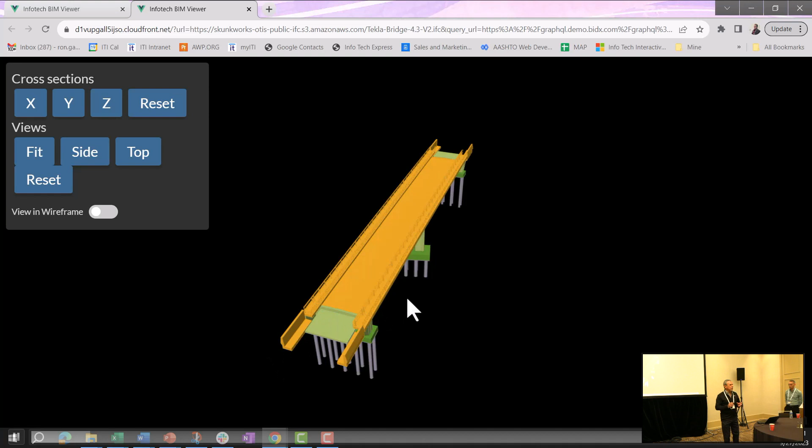I want to be able to bring any model published to IFC and be able to view it in the bidding environment and be able to use that model to do my bids. And so we developed a viewer, IFC viewer, okay?

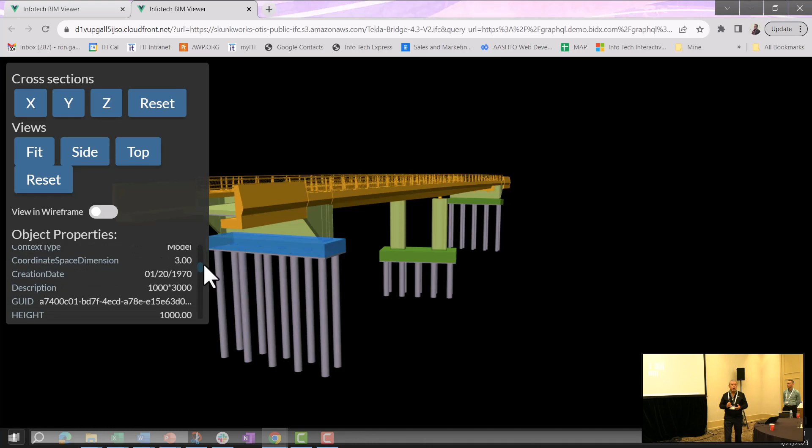And we've got models from Trimble Tekla that we use as examples in this. I've got all the models going to come up here in a second in a little video that we use to review. I've got some HNTB providing some Bentley models as well. And I forget who I got the Autodesk models from. You remember we got those from Bentley? We've got some Civil 3D models as well.

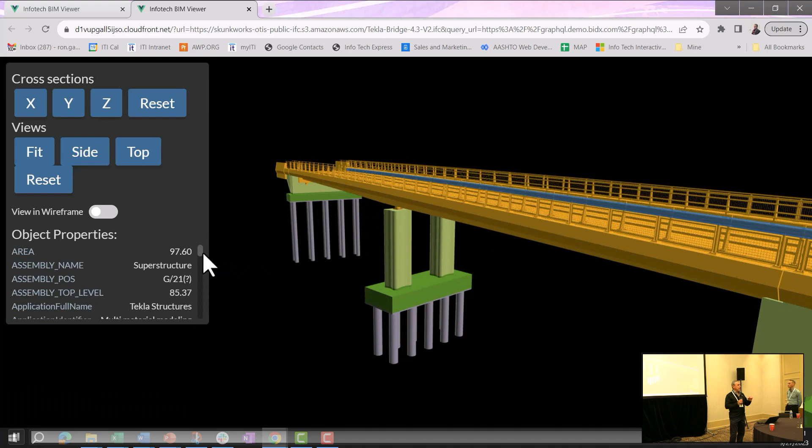But if you put the information in your IFC, we can query that model and find that information in the IFC model and provide it to you in a simple web-based viewer to be able to potentially use this in the bidding environment. So that, and the long-term goal is to give you the query and measure, the takeoff type tools that you need in a viewing environment.

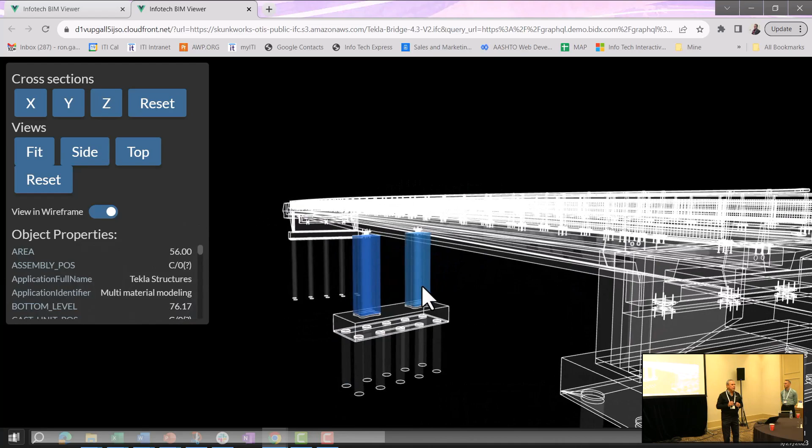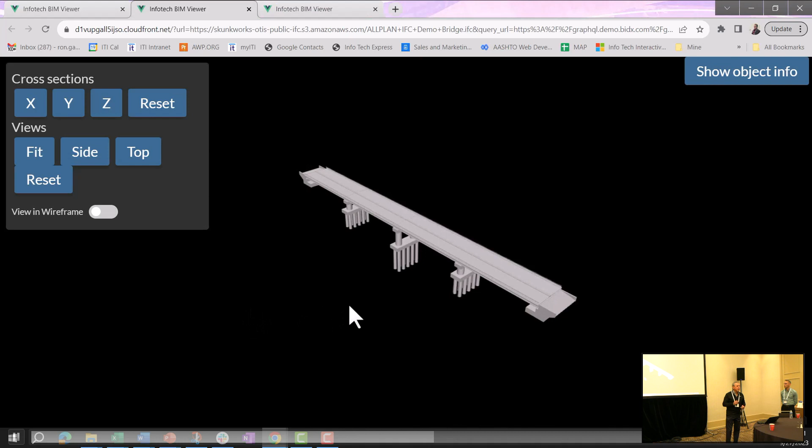And so the idea is here to give everybody a browser that you can come in and query this. And we show this to Trimble and all like that, and we think this is a way in the bidding world what we need to do. And Trimble's got some other tools that they do as well.

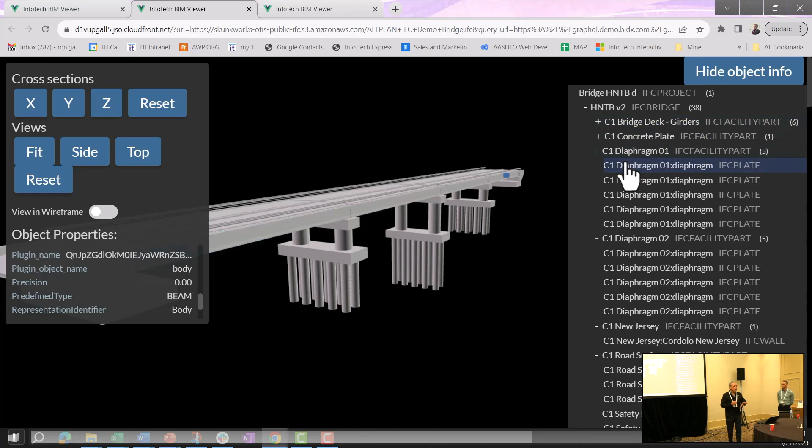And the great thing about working with people, we do compete with Trimble in a couple of places. But we identify those areas that we compete, and we do this with all the people we partner with. We identify those areas that we compete in, and we tiptoe around one another and play amongst them. But we're all professionals, so there's no reason why we can't get together.

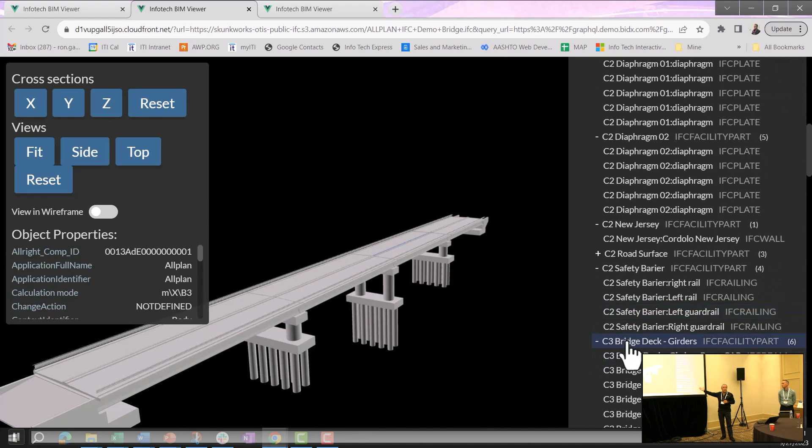But you see in this, if you come in and actually see all the IFC attribution. Now, let's be honest, this is only as good as you make the model that you export from your design. So you got to export a good, solid model for this to be useful. But it also shows you all the attribution that the CAD model is put within that as well. So this is kind of just a little prototype that we're working on.

And as part of look at that future, that vision of what we're trying to build toward, Adrian's going to share some of that with you as well.

And a key part of that vision being able to do that, is one of the things that I hear a lot is that AASHTOWare is a closed environment. AASHTOWare is not a closed environment. There are APIs available in AASHTOWare. It does run in a relational database, and you as a DOT own that data.

So there are ways, we prefer that you come through AASHTO, through us, to be able to make those connections into the model, but we can connect, and I'm doing a presentation with MnDOT tomorrow afternoon at 4 o'clock, shows you things that we're working on Connect, some tools together. We're doing some things in both the Bentley and Autodesk states to connect AASHTOWare with your design tools to be able to do the full connectivity and the full digital workflow that you need to be doing within this.

So I'm going to shut up and turn it over to the smart guy and say something a lot more useful than what I have to say. But Adrian, the floor is yours.

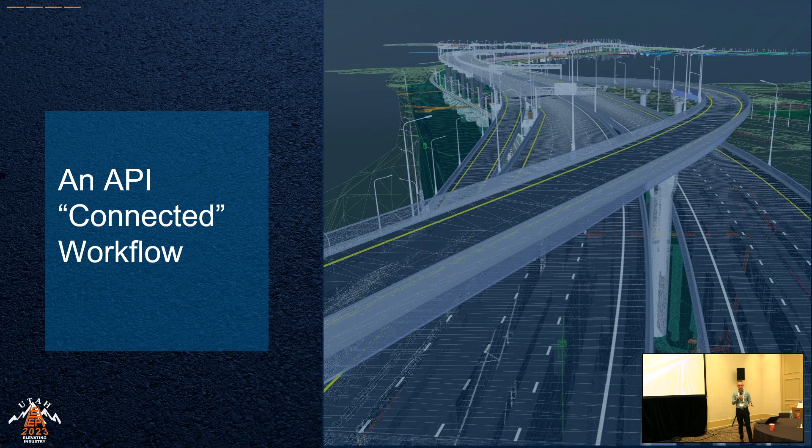Ron already mentioned some of the APIs, so that's really a core component here. Having access to that data and being able to use the best solution or other applications for what you're needing is really the key aspect of using APIs. So we can have that data there, we need to be able to access it, but you obviously want to be able to use it in your native program.

We at Trimble call our APIs connectors. Everyone else has a different name for those, but they're fundamentally the same thing. It's a bidirectional link between an open database, or an object-oriented database, and the native software, which enables you to design whatever you need in your design package, push it into the database, and then have it pushed out to the field and consumed by the machines actually constructing the project.

And then of course the nice added benefit is that data set then becomes the digital as-built. So the nice thing about those connectors being bidirectional is, of course, we can push any of those design changes back to the original designs if we need to.

Important point to note: if we're dealing with a model as a legal document, what we're dealing with is a design that doesn't change. But then of course we have additions to that design, so you can always refer back to it. That's really the nice part about having all that information accessible within a database.

One of the other key aspects of those APIs is that we're able to better understand the data at its core. So one of the things we're able to do here is, whilst this just looks like a spreadsheet, take the CAD standards for a state and apply that into what we call conversion rules. This is where we're looking at the data within the DGN libraries, or the feature definitions, and associating those within objects, or as objects within the database. That's a really big difference from just using a standard workflow.

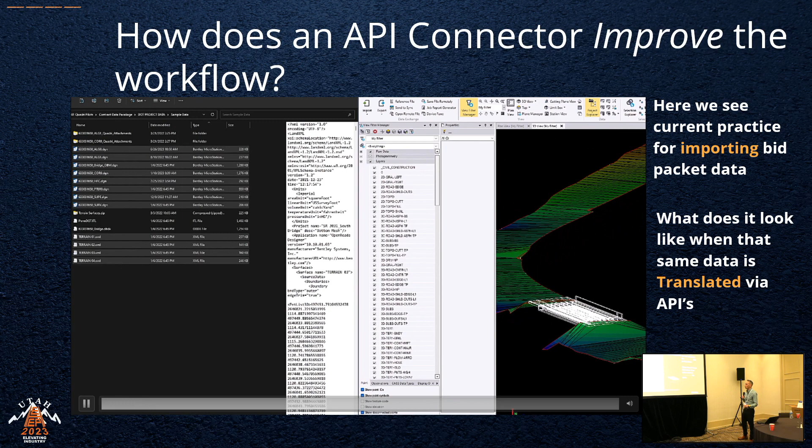So the benefit of these APIs is we're able to improve that. Now on the left-hand side, we're looking at that full same design data, which was able to use those templatized conversion rules, or APIs, to read that data in all of the objects, all of the solids and structures.

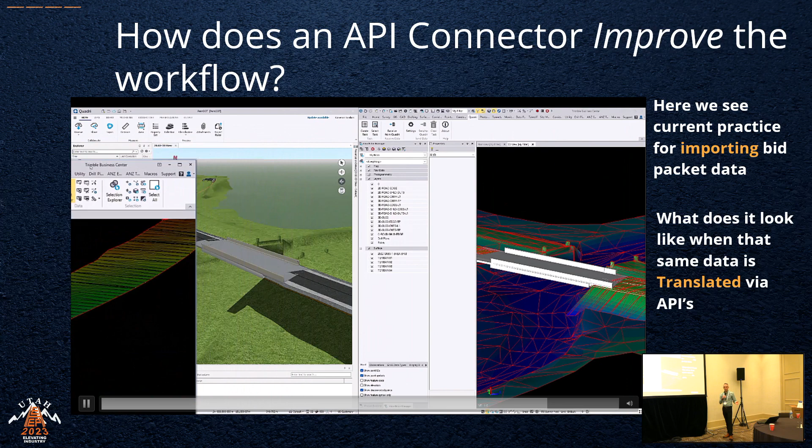And now on the right-hand side, we're looking at it from a contractor standpoint. As you can see, that data set is significantly different to what we were just looking at. It's far richer—we've got solid objects, we've got attribution, and that's what feeds into the process to go into the actual field solution side of things. So this is where we're improving the workflow, and this is how, by having a digital model as part of the process, we're able to get better data to the field, better data to the contractor, which is a win-win for everyone.

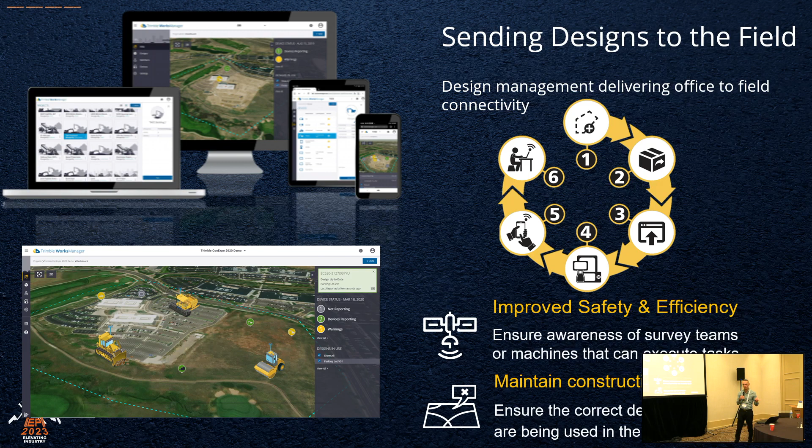So why do we want to have connected? We're showing taking the data from the design phase, but now we want to actually connect it to the field, and there's huge benefits associated with that. We can take those designs and ensure the machines constructing the project are using the latest designs, but it's also enabling us to be more accommodating of different changes. If we find a design exception or an issue with construction, we can go back to the office, update that design, send it remotely out to the machines, minimize downtime, and improve safety. In the past, that design change would have had to be loaded onto a USB stick, driven out to the site, plugged into the machine, uploaded—not even sure if it's the latest design. That's the benefit of office-to-field connectivity, and that's really what these solutions are able to do.

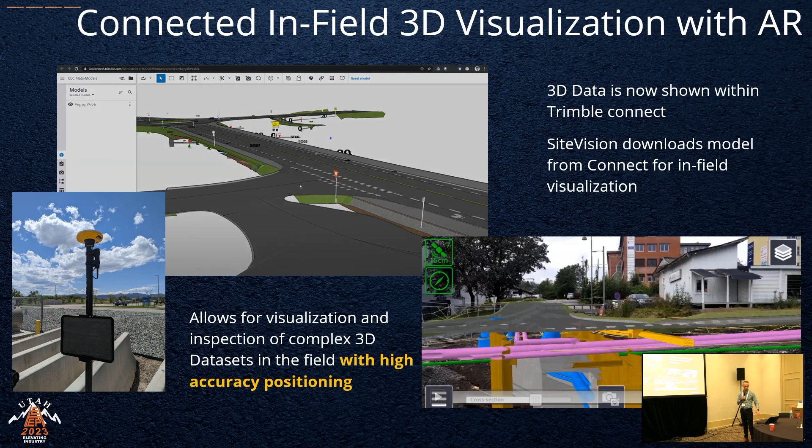The other core component is being able to visualize that same data in the field. So we can have our high-accuracy positioning solutions visualizing the exact same data from the same object database we were just viewing. Not only are we carrying all of those attributes across, but here we're viewing that data in the field. This is the same data the machines are actually using to construct the project. There's attribution on these, and we're able to visualize them with, in this case, an augmented reality viewer called SiteVision. The benefit is you can consider it a model or a viewer into the data stored within the database, which is what's actually being pushed out to the field.

From a contractor standpoint, and this is something we really like to focus on with Trimble—we've had contractors using digital models for decades. They've been recreating their own designs because historically they haven't got the right data in the first place, or more importantly, they just haven't trusted the data. That's the key benefit, I think, and this is resonating everywhere. I've been attending these IHEEP conferences for many years, and it's been great to see the transition of understanding what the contractor is going to be using. They're the ones where the boots hit the ground, actually taking that design and constructing it, and if we can improve it for them, it's a benefit to the owner as well—to the DOTs. It improves the whole process, and that's really where we're applying the BIM process.

So here they're actually taking those same designs. This is what they're seeing on their mobile solutions, what the machines are actually using to construct the project, and then being able to use that as part of the validation as well.

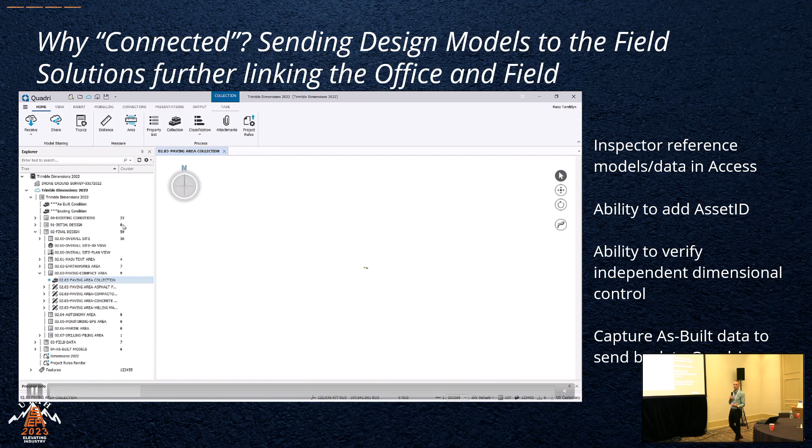So what we can also do is streamline the models for the field solutions. One of the benefits of the object-based workflow is when we read that data using those APIs, everything gets associated with an object, with an attribute, with geometry. The key benefit is you can then query that data. Instead of having to look at a certain file, unsure if you've got half your objects in one file and half in another, here we're able to look at each individual component. That's very helpful to the contractor as well, because they're able to segment that—they may want to estimate on the base of a retaining wall, for instance, because that's what they're being paid to calculate.

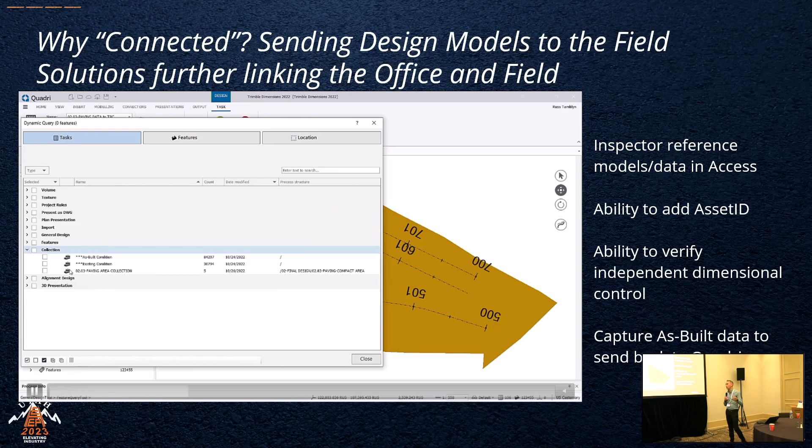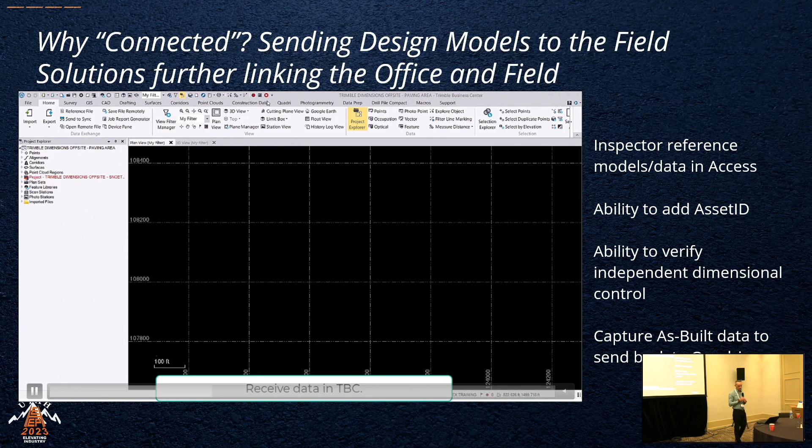So what we're showing here is effectively capturing that data, preparing it, streamlining it, and then utilizing this in the actual field solution phase. So what we're doing is improving it for the contractor to be able to take that, consume it, send it out to the machines, and then monitor not only where it is, or make sure the machine's using the latest version, but then capture data back from the field. And that's really where we get into what we're calling intelligent digital as-built.

So when they're actually constructing the project, this is what the contractors are actually seeing. It's important to see that from a contractor standpoint. We are seeing that with many DOTs that are actually using construction tools that the contractor uses to send the data, package it up, and send it to the machines.

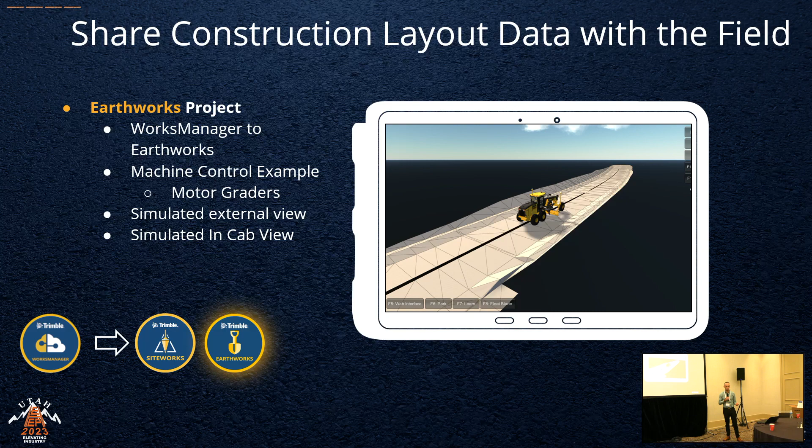It's important to see that in the design phase, because if you can prove that workflow, change your standards or deliverables to include contractor components, then that provides them with more ability to make sure they're actually going to use that data, for instance. This is what they're actually using when they're constructing it.

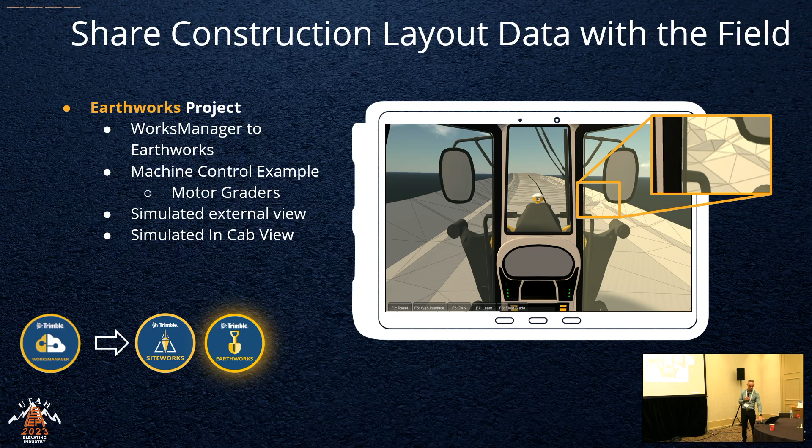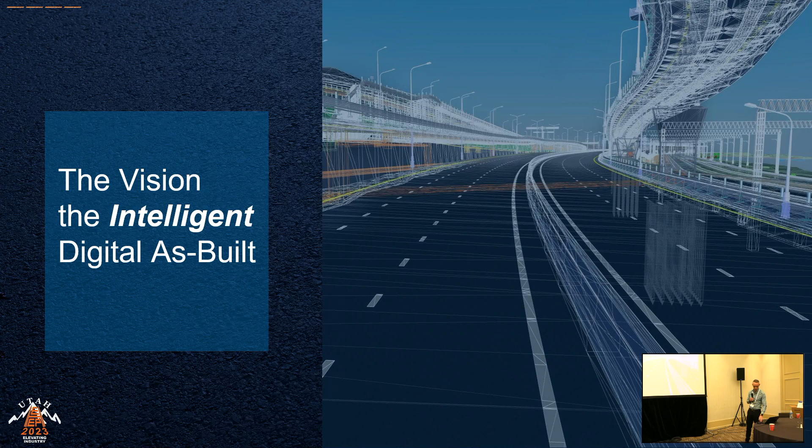And then we talk about what we're calling intelligent digital as-built. So what does that actually mean for us? Yes, we're talking about connected data environments. The intelligent digital as-built is where we're starting to capture data back from the field. So we've got the machines out there, they're actually constructing the project according to those 3D designs. All the blades on those machines are actually capturing data, surfaces, points.

In this case, we've got surfaces in the bottom left-hand corner. On the right-hand side, we've got each of those little data points has an attribute associated with it. That could be a CV value, it could be a pass count. The value of having access to that information as part of intelligent digital as-built really is important in the operations and maintenance phase.

Because what that means is, if you've got a section of road that's constantly subsiding, there's an error there, some issues there, we could go back to the original data, look at that, overlay it on the actual proposed and the existing, and say, right, maybe this was under-compacted, maybe this was over-compacted. So that becomes part of the history of the project as well. And because that's then associated with an object within the database, we can constantly refer to it, we can query it, we can identify it. So that's where it's very helpful in the operations and maintenance phase.

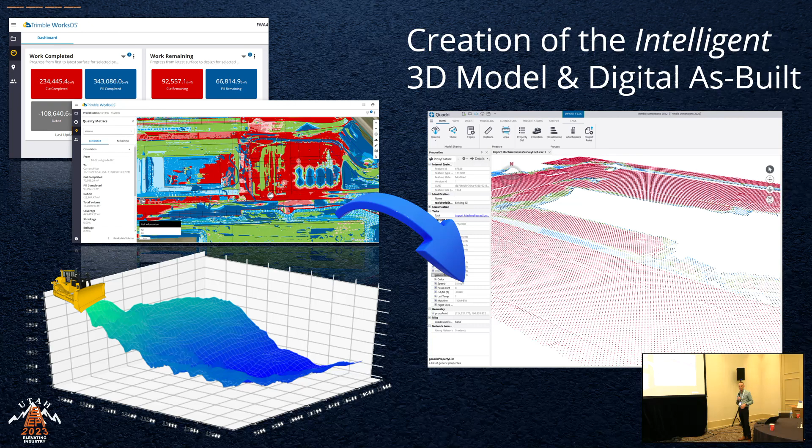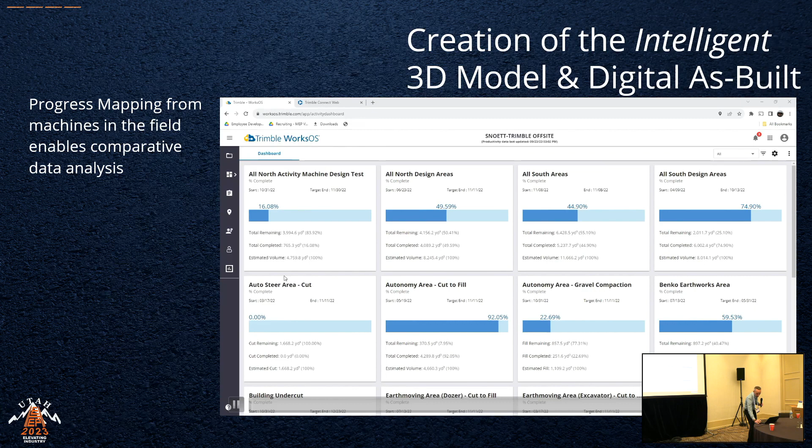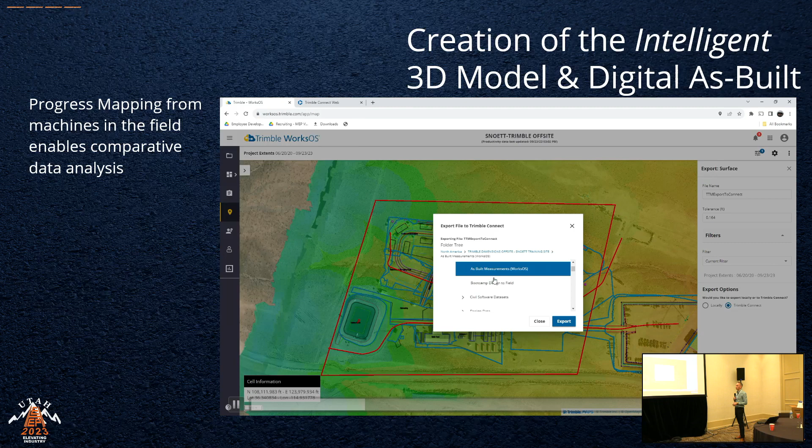So how do we actually capture that data? Just to give you a very quick example of how that actually is captured: here we're looking at progress mapping for earthworks while the project is being constructed. So we're now generating those surfaces. What we just saw in the Quadri database, or the object-oriented database, that data overlay - this is the source for that information. In other words, we're actually exporting that as a surface, because now we can actually start to do comparative analysis with it.

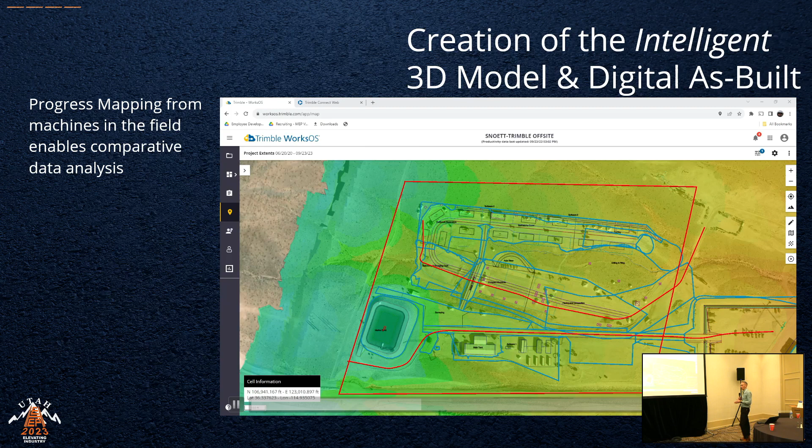So not only does it feed into the actual as-built phase, but it also works in the actual construction phase too, because I can monitor where is my proposed, where is my actual, and then look at my progress and be able to say, right, I need more additional equipment on site. These are the kinds of decisions that the contractor is making. So if they're able to get better access to the design data in the first place, and then be able to compare back to it as part of the process, that's how you get this added benefit throughout the whole construction phase.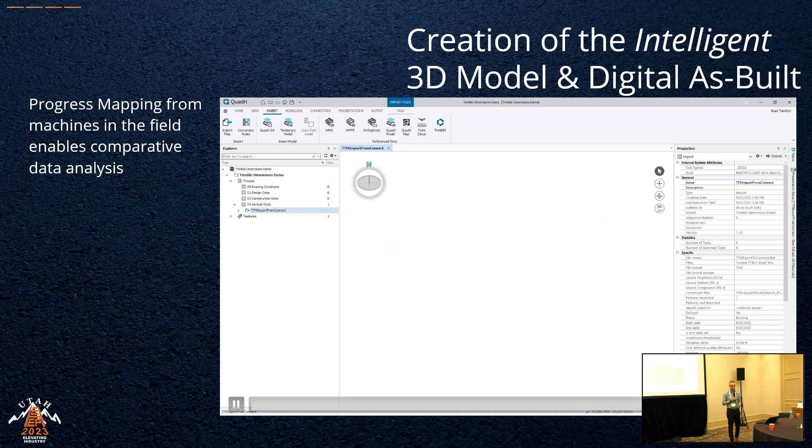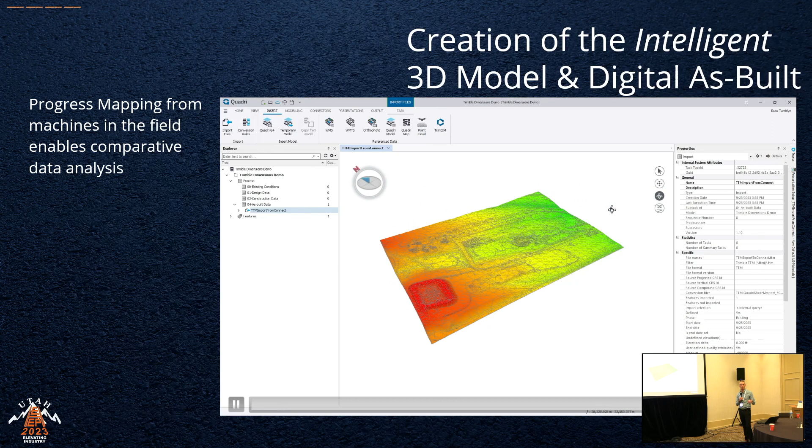So this is now bringing that same data, and we're overlaying it on the original design data within Quadri. We're using those same APIs we discussed, overlaying that information all in the same place and visualizing it within the database. And there's that surface, a little hard to see, but you can see the triangles and wireframe underneath. That's an actual surface generated from the project itself, and it becomes part of the project history.

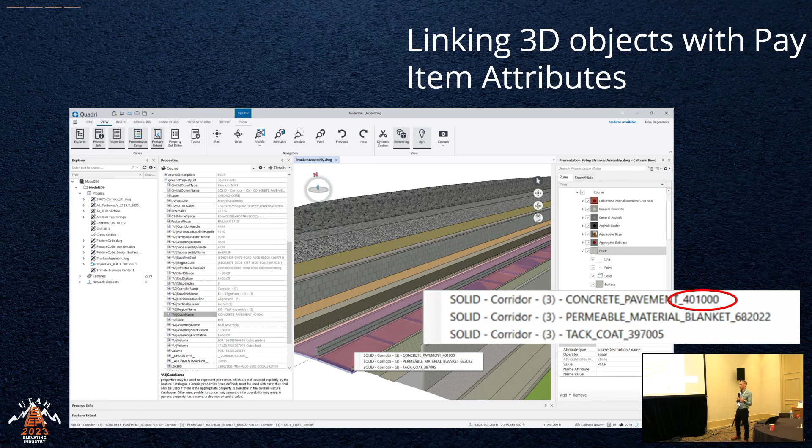So going back to what Ron was talking about earlier with AASHTO and pay item codes, what if we could now associate those attributes, those objects, or that attribution to the objects within the database? That's essentially what we're able to do now with that intelligence. Here we have a Caltrans template, for instance, with textures matching their design standards, back to those CAD standards we discussed, even the way you visualize the data. Now we're looking at the AASHTO pay item code associated with that pavement object within the database.

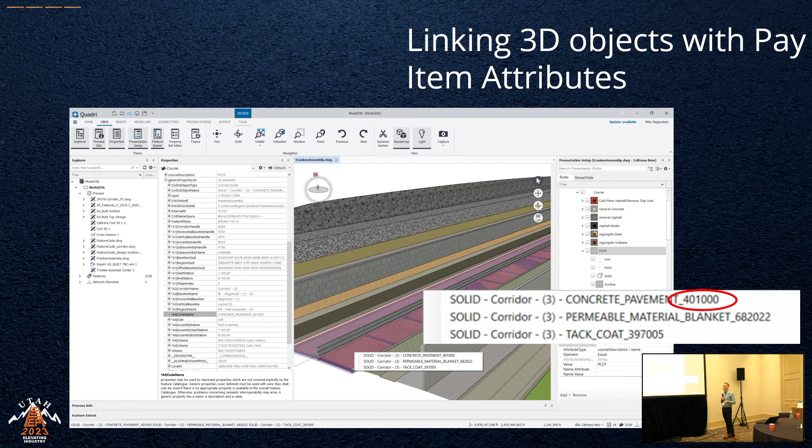So hopefully you're building up a bit of a picture here, we're adding intelligence to the data, adding intelligence to that design model. So instead of just losing data each time you change between phases, we're actually adding intelligence. This is how you get to that true definition of the single source of truth.

And even expanding on that, what if we could take pavement condition analysis, look at deterioration models using tools like AgileAssets, run those models, and then add that as the PCI attribute to the pavement object within the Quadri database? This is again how we're adding intelligence. So we've got the AASHTO pay item ID, we've got the PCI added to it. We can add that information into the process using standard tools. We're not replacing any of these databases, we're just linking to them. That's the benefit of that API connectivity.

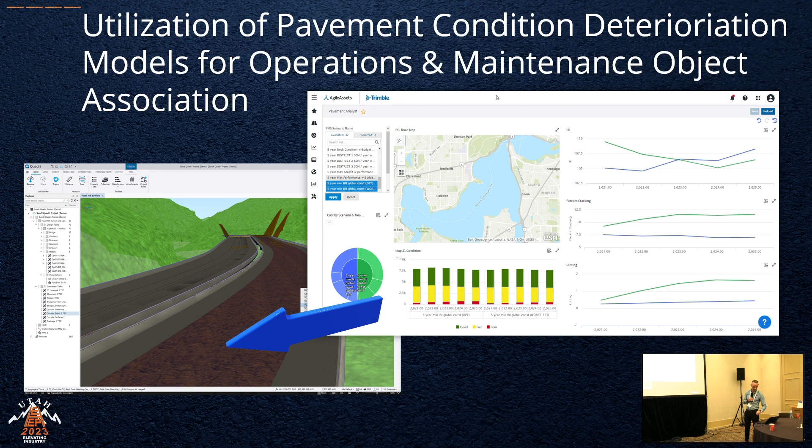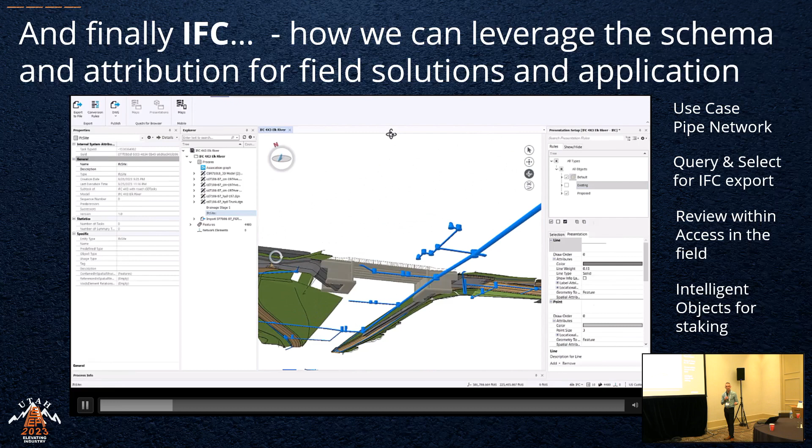And then of course, Ron talked about the IFC component, and that's a very important aspect. Being able to send those IFC objects out to the field is very important. What Ron was showing with that viewer, here we're taking basically that same concept, taking aspects from the digital as-built, stored within that object-oriented database, with all that rich IFC attribution.

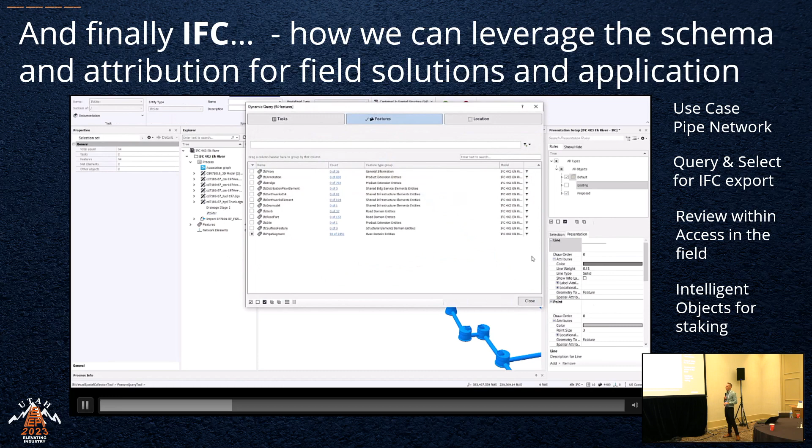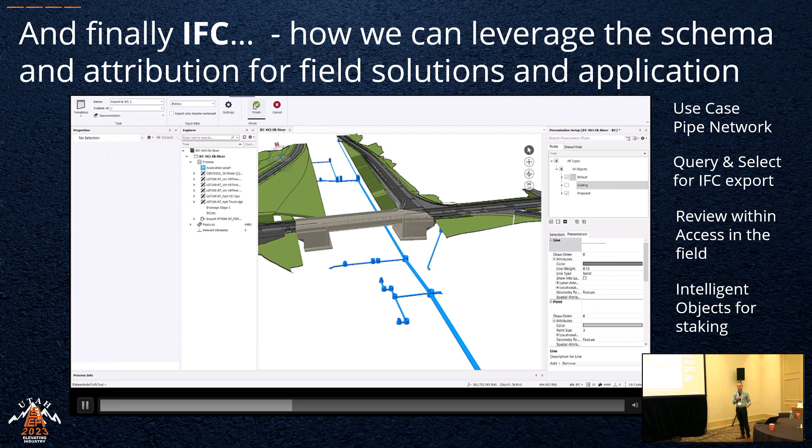Here we're looking at a utility network, for instance. We've got the intelligent objects that we're able to take to the field. Same thing, this is what the contractors are going to be doing once IFC adoption progresses. But the benefit, again, we've got that standardization, everything adhering to that schema, all of the attributes adhering to that schema.

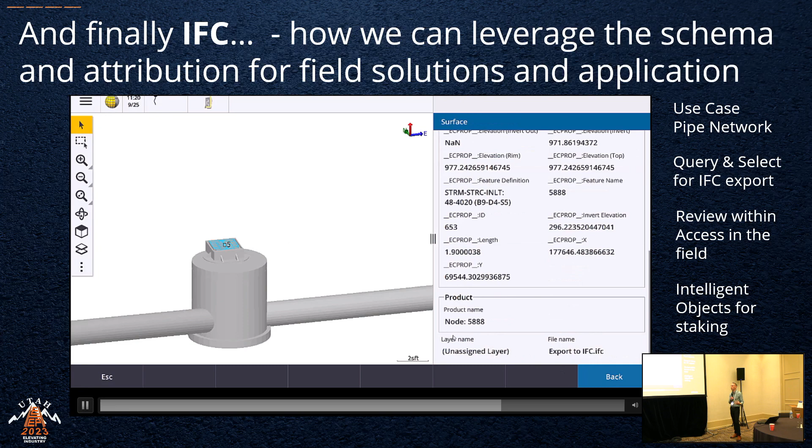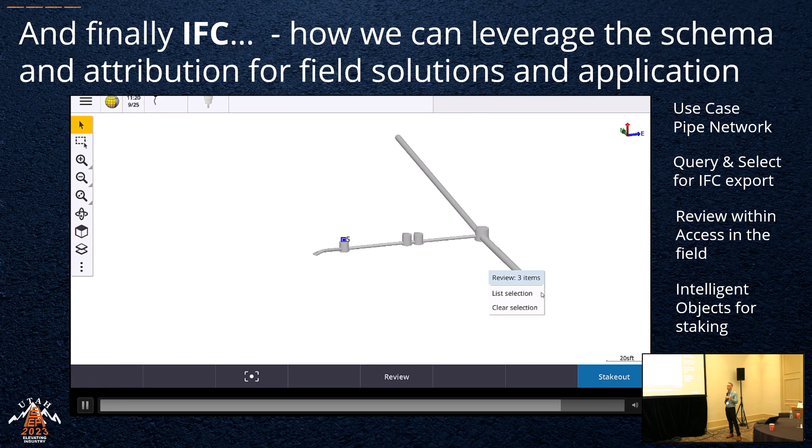Same concept here, this is how it's going to really help push the industry forward. Instead of having lack of information, no attributes, whatever, we've got not only attributes there, but they're all according to that schema, which, like Ron said, I believe will be locked down by the end of this year or Q1 next year, according to buildingSMART.

And then, of course, part of our discussion was to partner with the industry, and that's why we've partnered with Infotech. That was really where our mobile inspector, where we wanted to partner with Infotech for the mobile inspector side of things. What was born out of that was the concept that we needed to add high accuracy positioning and essentially inspection data to the AASHTOWare component via mobile inspector. So instead of typing, writing down coordinates, things like that, by adding that field data capture component, we're minimizing rework, minimizing errors, and again, this is where collaboration within the industry is really helping push things along.

That's something we've been working on, and it's been expanded and received really well.

A couple more slides here, just to talk about final digital as-built. What does that actually look like? We talked about intelligent digital as-built, how we can capture all that data, and how contractors are using that information in the field. Now we're getting back to the operations and maintenance phase, and how we can have that rich data set as part of that.

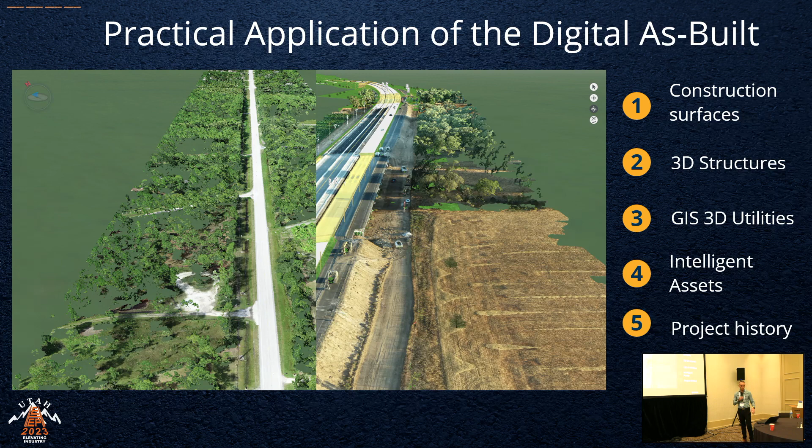So we want to be able to keep those construction surfaces that the contractors were creating, overlaying those, comparing those to the designs or proposed designs as well. Those 3D structures with attributes, according to those IFC attributes, the GIS, 3D utilities, for instance, and then being able to have those intelligent assets we were just talking about, with everything loaded back into that project history.

The last little video I want to show you is what does that actually look like. So within that object-oriented database, we've got that same data that is being used to construct the project.

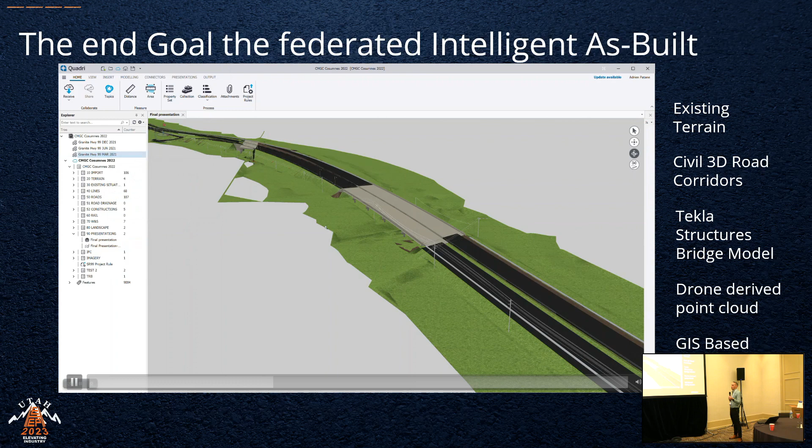And then we're able to start to bring in all these different data formats. So now we're looking at the point cloud information that's been brought in. We've got those 3D utilities, we've got full road corridors — in other words, those road corridors are what the contractors need to actually construct the project. So we've got that information in.

We're able to add PDFs, we're able to add tabular data to the object within the database as well. And that's how we get to a true digital as-built, digital twin, whatever you want to call it, that has all of the project history as part of it.

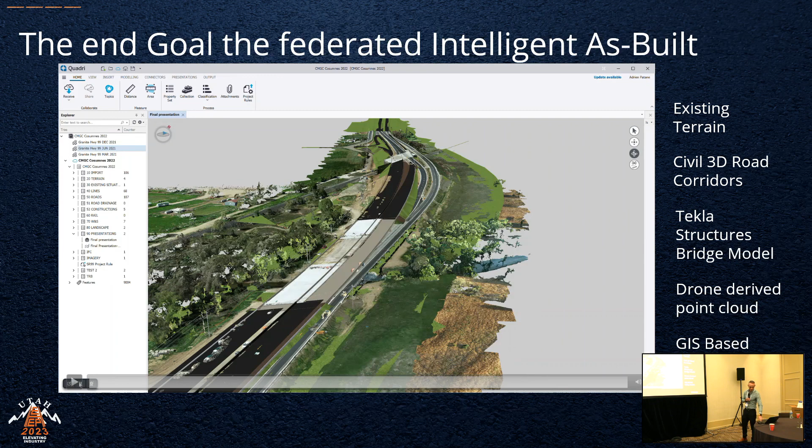And that's really where the industry is going, and that's where we're partnering with everyone, with Infotech, to really push that forward. So that's really my part there, and we've got a little bit of time left for questions, I guess.